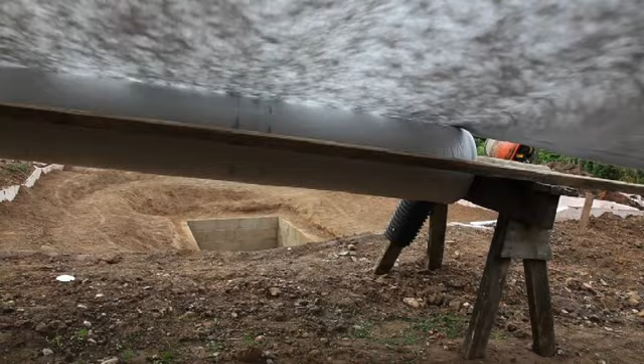I'll show you how I made this pool, and a new smaller plunge pool. The construction for both is the same. I'll show you my techniques for the installation, as well as the more novel ideas. How to make the swimming area with flat and smooth walls, without needing to cut the liner. Insulating the swimming zone, to help preserve the warmth gathered from the sun.

A pool filter built from scrap and domestic plumbing, running silently except for the sound of bubbles. And a solar-powered circulation system so animal-friendly an adult frog can pass through without so much as a bruise.

I like to think that many of us have come to the conclusion that what makes us happy in life is being connected to what's happening around us. Plunging into a natural swimming pool, you are totally immersed in nature and the environment. A truly exhilarating experience. And owning one of these is not an impossible dream. It's really quite achievable. After all, if I've done it, then many people can do it. So I hope by showing what I've done, that will inspire you to get out there and start digging for yourself.

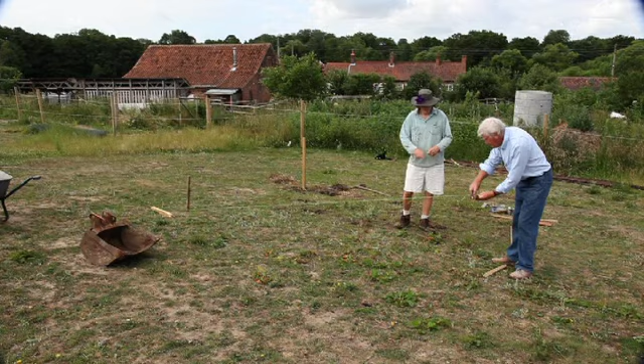To help us get right angles for the corners, I've prepared some string. A 5 metre length, a 3 metre and a 4 metre length, the same length as the plunge zone, because conveniently a 3-4-5 triangle is a right angled triangle. And with this triangle I can define the entire area.

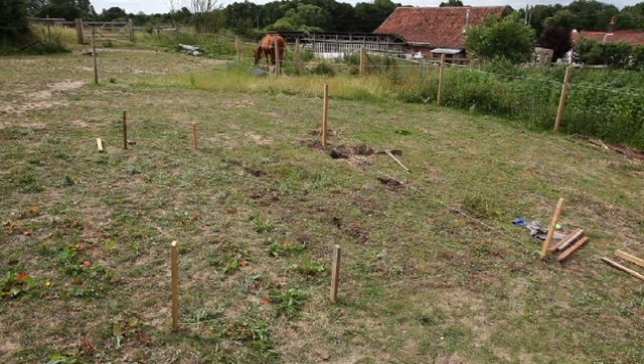Before you start, you should talk to your local planners to see if you need to apply for permission. You can dry hire diggers, but best of all, take your time and dig it by hand. There's no better fitness regime. Barry, can you do just a bit more digging as you were?

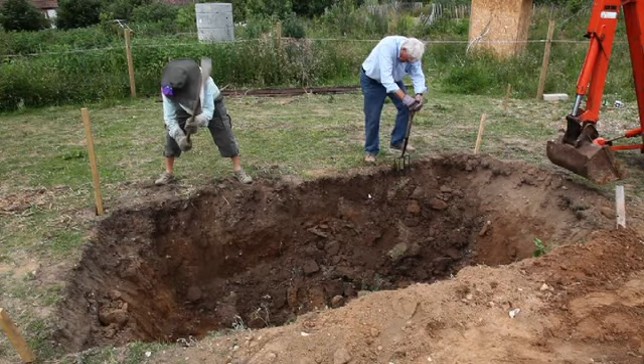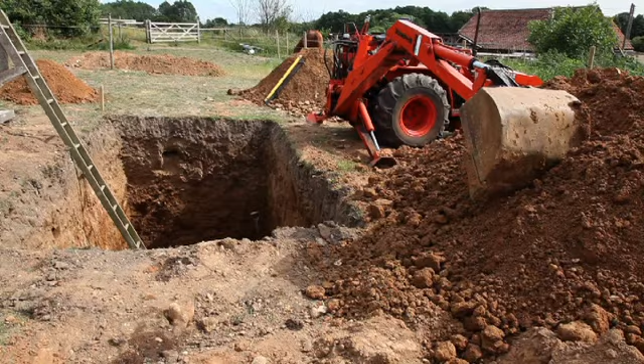The hole is now 2 meters deep. That's a lot more gravelly, isn't it? Yeah. We can dig a trench for a foundation that will carry a 1 meter high concrete block wall. We've been recovering some reasonable sand and gravel for us to use later, and making separate heaps of topsoil and subsoil.

The weather's been so kind to us. It's been nice and dry. It's allowed the integrity of the hole to stay in place. If it was wet, this clay would just turn to slush, and there's no way we could dig down like this. But as it's so dry, you could almost abandon the idea of building a concrete wall and just sculpt what we've got, the clay. But the situation could change very quickly if it rained, so I think it's best to pursue the idea of making a 1 meter high concrete wall.

I've made an important tool. I've drilled a hole through the cap of a plastic bottle and pushed in some 6mm diameter aquarium air pipe. I've also put a hole in the base to let air in. This is going to measure my levels.

Barry's not convinced though. Okay, now will it work? Barry the skeptic. Oh, yeah, is it going to be accurate? Well, we can just tell by looking at this, can't we? Okay, the length of that is about 5 meters. Millimeter accuracy. Yeah, it's not over 5 metres, it's only over the width of that. What do you mean? What, are you saying gravity is not going to work over this part of the pool, but it is over this part? It's going to be different. Gravity is different in different areas, isn't it?

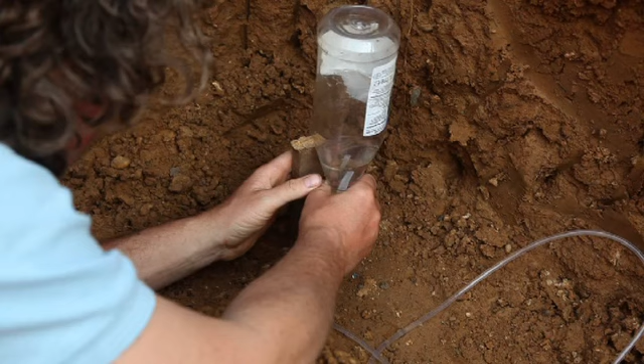Oh my goodness. Of course, I have to remember Barry's in his 70s and is far happier with a rotating prism laser level. Okay, that's level with the top of the peg. The top of the peg is 25 centimetres from the base and is the guide for the foundation thickness. Other pegs around the trench need to be level with this.

Yeah, right, no? I think it would have been better with the 2 bottles on. You see the level better. Oh yeah, now it's just a matter of seeing it better. Before it was a matter of it wouldn't work at all. I was only pulling your leg.

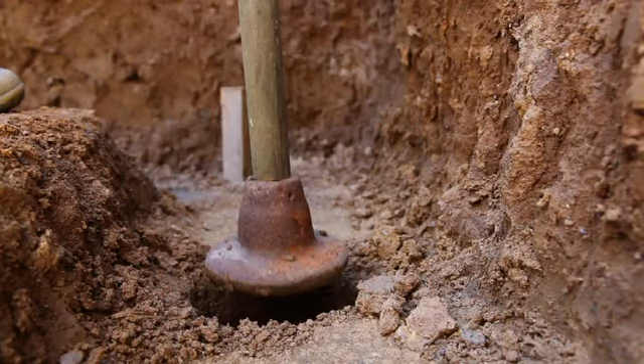Having been wound up, time to unwind with my auger. These holes will form piles in the foundation, just to help it grip the ground more. I've put them every metre or so.

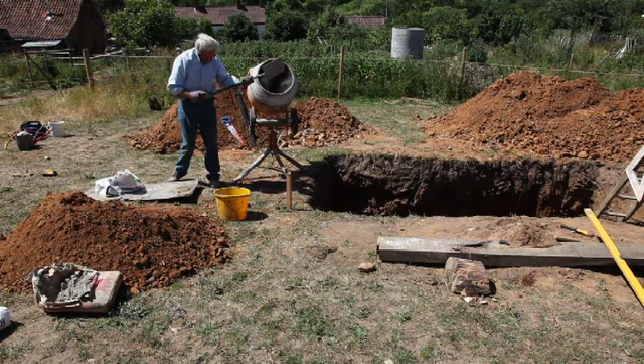Barry's mixing up. 6 parts sand and gravel to 1 part cement. Cement requires an awful lot of energy to make, so I don't want to use too much on this project. 8 bags in total will be needed for the foundation. Just a small amount of water to make a pretty dry mix. It should make less of a mess, and be easier to move around in the barrow.

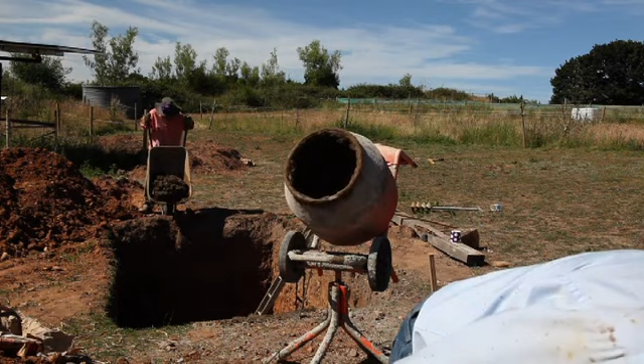Barry prefers the more direct approach. Our pegs show us the right level to smooth the concrete to. Top of the peg there. We finished the foundation, but as it happens, we don't know how lucky we've been.

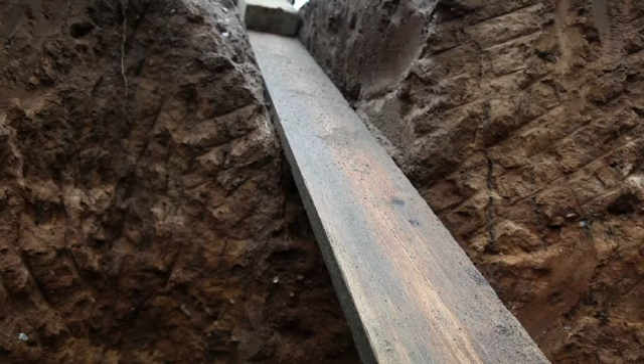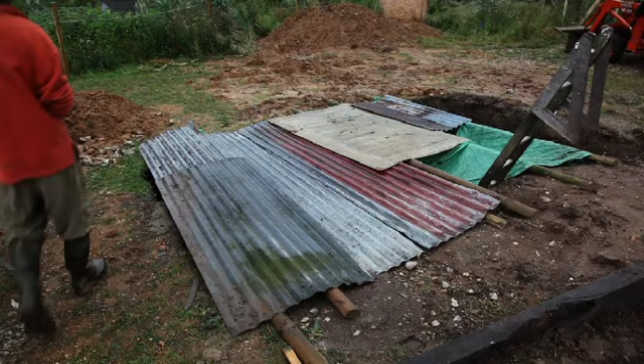The concrete blocks have to be stacked in the hole ready for building the wall. Barry has taken a look at the clouds and forecast rain, so he's cleared off home. Barry's weather eye was right. And in the hole there's more water than I imagined, producing a surprising water spout. The floor is covered in clay slurry, washed from the walls. They are badly damaged by the water. Yeah, the sides have collapsed. Well, one side, so I'm a bit fed up.

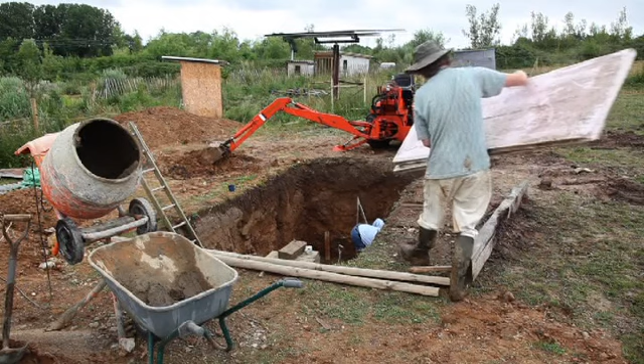The signs aren't good. Barry is pensive. There's only one option. Start building the wall. Yeah, pretty quick. On Wednesday, I think there's going to be some more rain, isn't there? Is there? No, I don't think so. But tomorrow? Well, yeah, there's tomorrow, isn't it? Yeah, it's a pretty unsettled week. So, with a sense of urgency, we put down the first row of blocks.

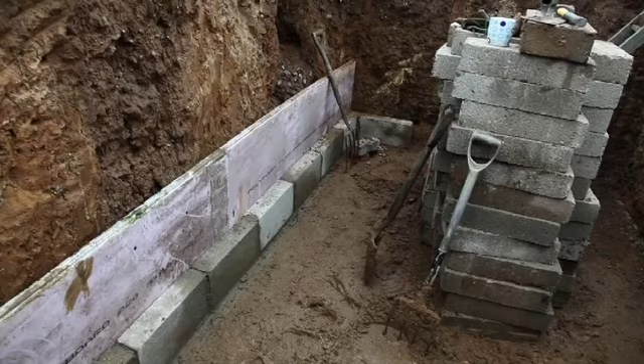I picked up some 50mm insulation from a reclamation yard. I've done some rough calculations, and insulating the wall of the swimming zone looks like a good idea, especially for a smaller pool. The ground temperature at this depth stays around 11 degrees centigrade throughout the year. In summer, the pool will be at least 10 degrees warmer. That temperature difference means that heat will be lost through the walls and floor. Insulation will reduce that loss, so the water should stay warmer.

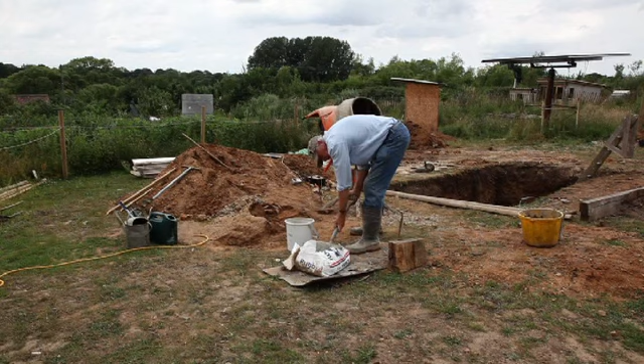The mortar for the blocks needs finer sand. Barry's doing the mixing, 4 parts sand to 1 part cement. A string tied to a couple of bricks in the corners is the guide for placing the blocks in a nice straight line. Although this wall will ultimately be hidden behind the liner, it's important to keep it all straight and level. If you start letting it drift, progressive rows will be even more deviant.

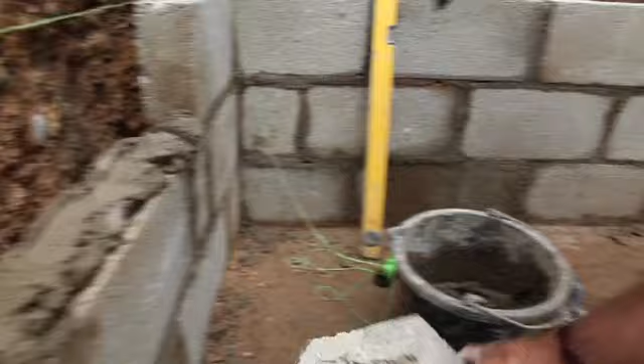The mortar ratio seems more variable. About 4 to 1. Mm-hmm. Well, that's about 5. Or sort of 5. Yeah. Barry's mortar proportions are difficult to pin down, just like our visitor. Come on back down again.

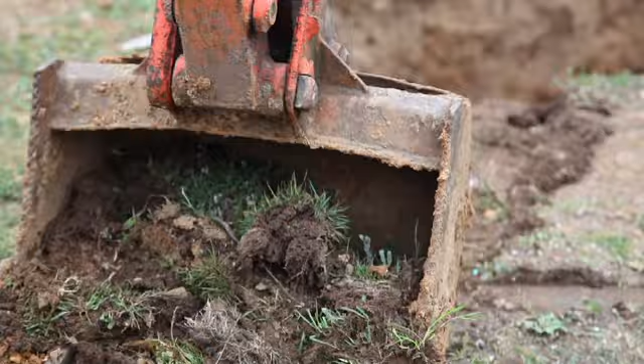Fortunately, the rain has stayed off, and the wall is high enough for me to start removing the rest of the topsoil. This is the profile I'm aiming for. The swimming depth is 2 meters. The block wall 1 meter, and then a sandbag wall on top, finishing 1/2 meter from the surface. Once backfilled with gravel and subsoil for the plants, the slope to the edge of the pond will be around 1 meter in 4.

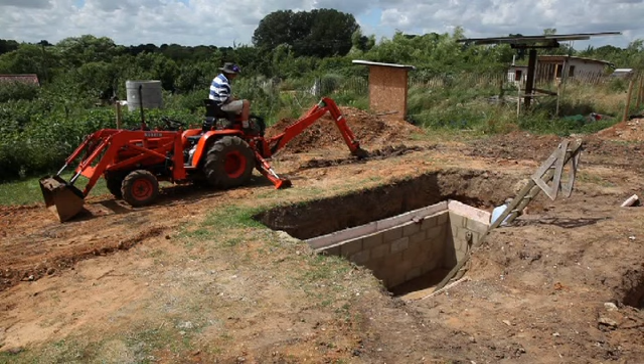I've made a trench 2 meters from the edge of the plunge pool to define the area of topsoil to be removed. Barry's finishing the wall. We built it up to 5 courses of blocks, just over 1 meter high, and all insulated. Although this topsoil is pretty poor, it needs taking off and heaping up out of the way. It will be needed at a later point for the landscaping.

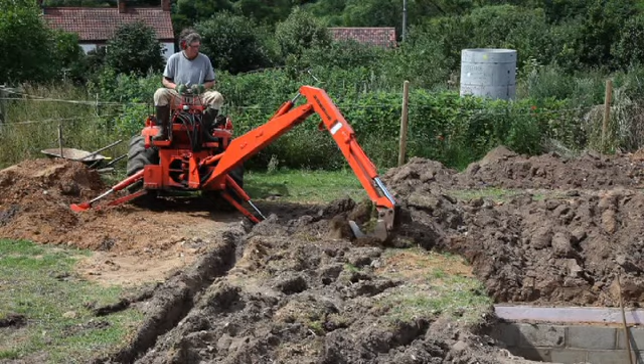Judging by this performance, you're probably thinking getting professional help for the digging may be well worth the money. For a pond this size, with a proper digger and driver, I reckon it should come to a total around £300. After the mauling by the machine, it looks a bit of a mess, but at least we are beginning to see the shape. All that's needed now is some hand crafting.

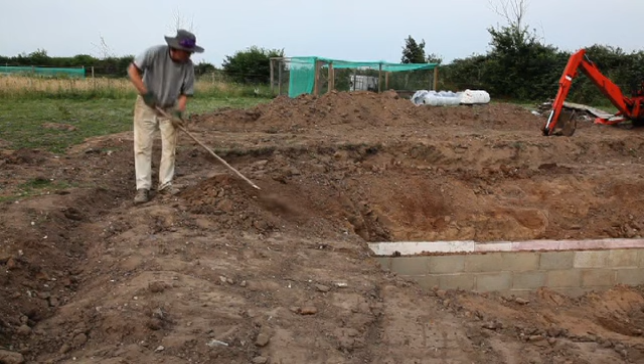Barry has gone off to work on a proper job, and I am left alone with a couple of chickens and my bottle. Actually, I've since found out it's called a bunyip. I've mounted the bunyip on a post corresponding to 2 meters depth. The pegs are showing me what will be the finished water level.

As this site is on a slope, I need to build up this side of the pond to this level, because that corresponds with 2 meters depth of water, so it needs to be that level or above. So I've got to build the earth up here. I thought what would help me are these insulation panels. I got them from the reclamation yard really cheap because they came from an old turkey shed. I thought I could just put these here and build up the earth either side, and that would form a retaining wall for me.

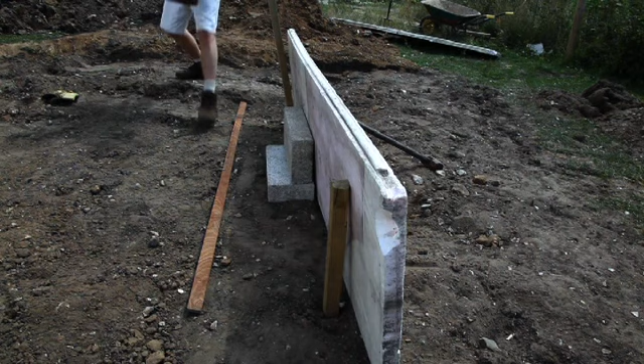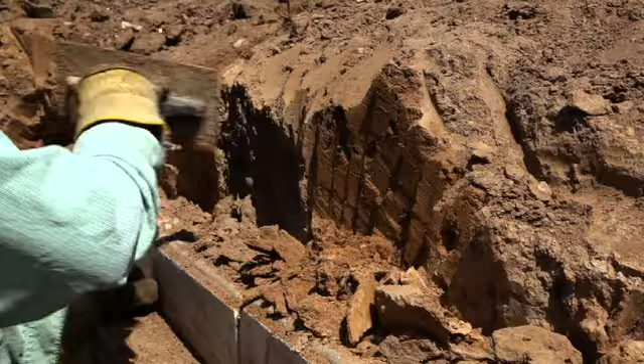These sheets are just what I had to hand, but you could use a variety of materials. Of course, if your site is level, you don't need them, and you've got a bit less work to do. I'm piling up subsoil either side and starting to make a smooth bowl shape. If the subsoil was less stable, I could have made the wall stronger. By stacking the blocks face down, this would make the wall around twice as thick. Of course, it would need twice the number of blocks and a wider foundation.

The good thing about having an edge is now I've got something to discriminate between my rubbish stuff and the good sand. The section that was washed away in the rain has been filled and needs tamping to help it settle. To trim off this insulation, I'm using a kitchen knife. It's not a very good one. Certainly won't be much good after this, but it does the job. When the liner goes on, we need the ground underneath to be firm, otherwise the weight of water will put it under stress.

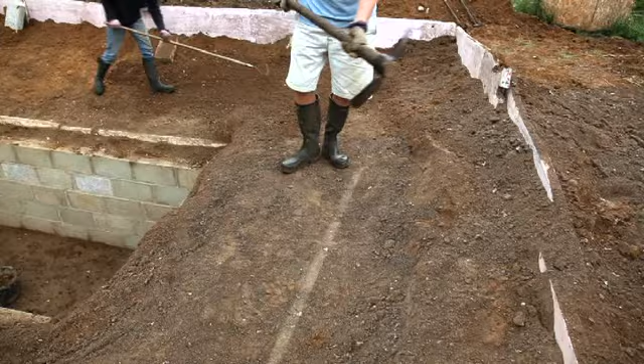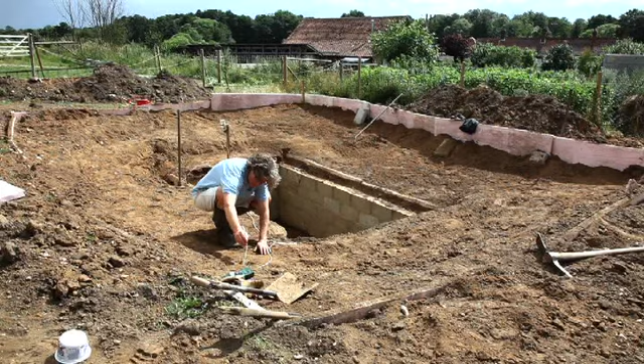The pond's bowl shape is getting smoother by the hour, and it's a very satisfying sight for a pond maker to see a pile of sharp flints safely outside the perimeter. I'm having bunyip withdrawal symptoms, so it's back out again. I'm checking levels just to make sure this bowl shape is going to hold water.

It's very important to fill behind the wall with sand or subsoil. When the pond holds water, if there's a void, the wall won't be able to transfer the pressure from the water to the ground behind it. Potentially, the wall could crack. Probing with the handle of my tamper, I can feel a large hole here. I'm trying a trickle-down approach with a clay slurry chaser.

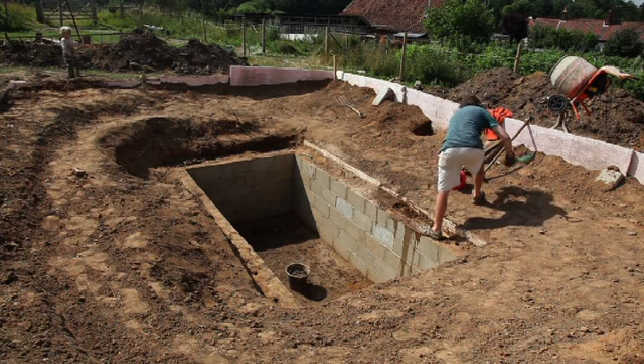Felix thinks the important bit is to do the outside of the pond. A big void. Ooh. Bit of a sloppy cob mix, isn't it? This is how not to build a cob wall. I tell you what. Oh.

So Alison's very kindly cleaned the bottom so it looks a lot better down there now. We're just going to go around the outside smoothing as much as possible, and hopefully the rain will keep off, and that will allow us to get the underliner there, and then the liner. Once we get the liner in, we can sort of relax, but we can't at the moment.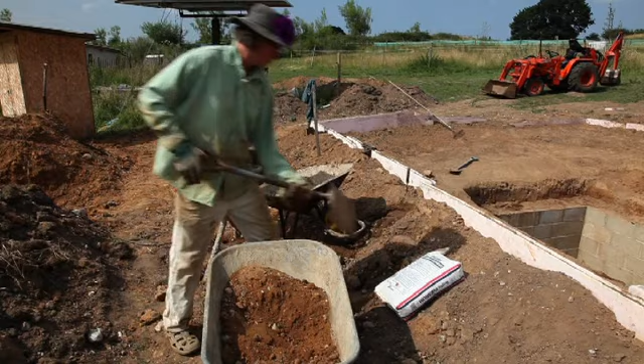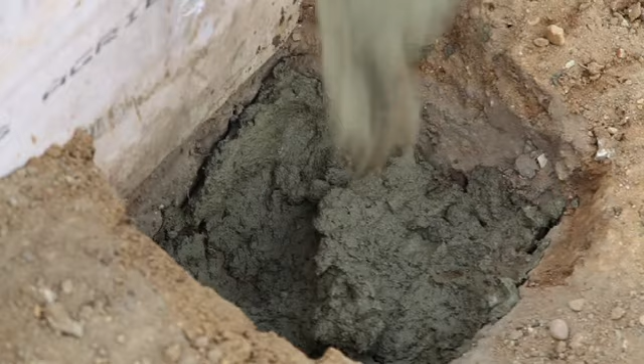I'm mixing up again to make a foundation for the overflow drain. I've dug down to firm subsoil. And I'm adding another piece of insulation board just to make the wall a bit stiffer. The foundation for the drain has hardened. I'm taking off the rough edges to be as kind as possible to the pond liner. Not content with that, I'm also giving it a comfortable bed of freshly sieved sand.

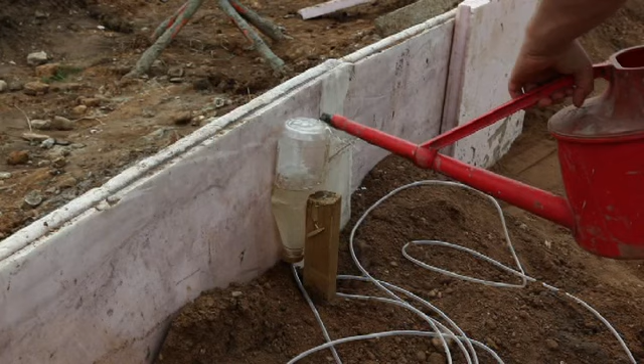I'm going to share the delights of the bunyip with Jasper, my eldest son. Yeah, it's come down. Okay then, can you mark the water level on the insulation? We're marking the maximum water level on the insulation boards. Very good. It also serves as a simple physics lesson. I'm learning quite a lot. Sorry about that. Now I know what level to trim the boards.

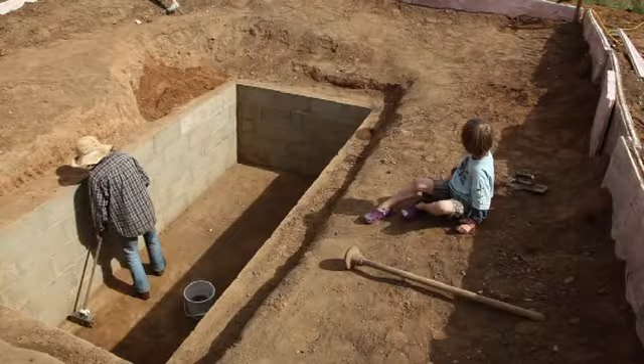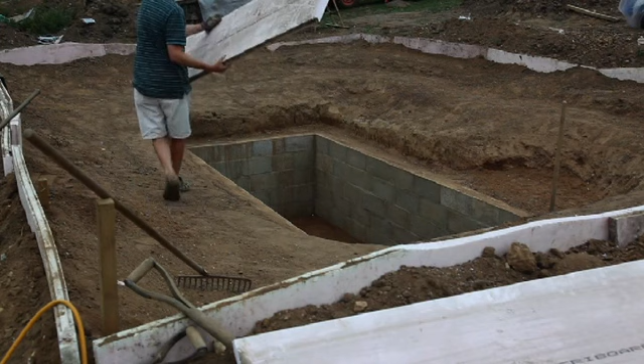Smooth sand makes for a nice smooth bottom. Yes, it's more of this stuff, reclaimed from the turkey sheds of East Anglia. Just a topping of hand-sieved sand brushed into the cracks and corners, and it's all prepared for the brooding presence, the underliner.

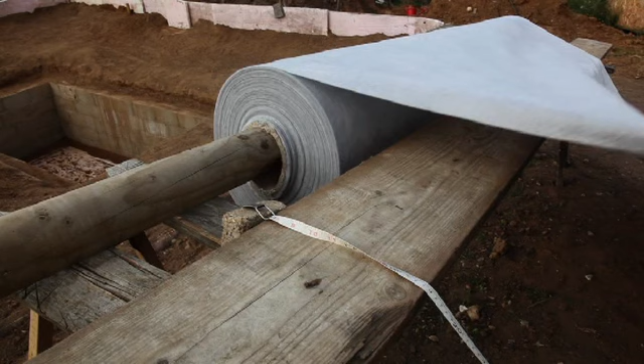The pond is 6 meters wide, but goes down 2 meters and then another 2 meters back up, so I need 10 meters width of underliner. The fabric is called Polyfelt TS60, 260 grams per square meter. It's a non-woven synthetic material. I'm cutting enough lengths to cover the whole surface and go up and over the outer edge.

To fully protect the liner, the sheets need to be stuck together to form one continuous protective layer. It will also help stop them blowing away. But glue is not the answer. All you need is one of these. There we go. Look at that. Make it a bit better. Stuck.

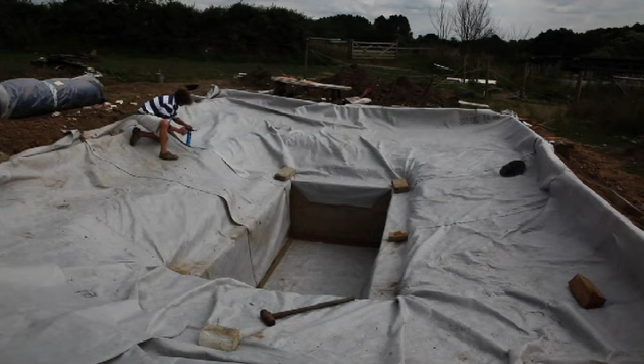Another length of underliner lengthways, and the bottom will have 2 layers. I've also put another layer on the top edge of the wall and in the corners. Now we're more than fully covered. A large, expensive piece of plastic is arriving.

Okay, lovely, that's fine, thanks. It's the liner. Thank you very much. Lovely, great. Thank you. Thank you very much.

It's early morning. Cue the cockerel. I've not used this product before. It's a synthetic EPDM rubber called PondGard, manufactured by Firestone. It's sold as seamless, but I think these are seams.

Now, I've got no problem with the seams actually leaking. I don't think they'll do that because they've been done in a factory. But it's when I come to fold it, if I'm trying to make a nice, neat fold and I hit a seam, that might just make it a bit awkward. So I'm going to give them a ring and see why I've got seams in my roll.

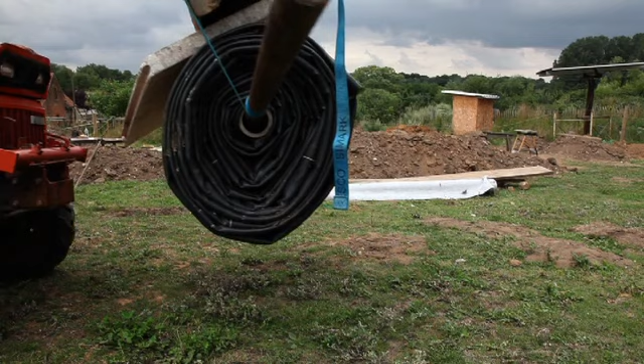It seems they're not seams. They're called joins. They've been fused as part of the manufacturing process, so can't fail. I figure they should also fold reasonably well, so it's full steam ahead. The liner is just over 15 metres long and 12 metres wide. There we go. Whoa, she's away. It's 1 millimetre thick and weighs 232 kilograms.

A team of 10 men is recommended to move this around. Otherwise, find a friend and a stick. The liner is rolled by the suppliers in such a way that it needs to be positioned lengthways in the centre of the pond. Then it can be unfurled to one side and then the other. You'll have a huge job if you roll it out the wrong way and have to rotate it afterwards. It's hard enough doing it the right way.

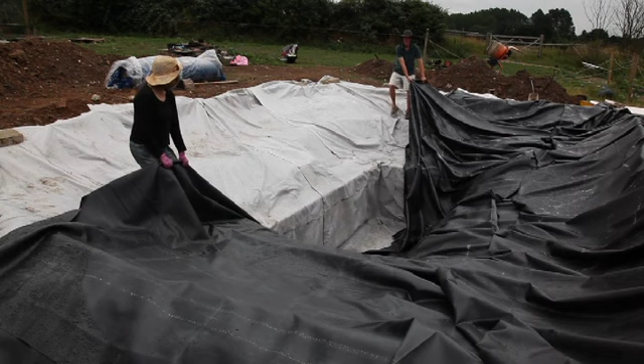Got one end. Oh, one side. Well, we've got half done. Right, here we go. Well, we've got water in it. This heaving and pulling is self-explanatory, but I think it's useful to watch the struggle. You all right? No, it's fine. Well, I think that's it. Well, not quite yet. Right, where do you begin?

Yeah, do you? If you're directly in line with this wall, just the edge there, what we're going to need is a fold which is actually half that height. So that's about 1 meter 10, so it's going to be about 55 centimeters. So we can just do it roughly. That's it. Yeah. And this will roughly sort of work out, and then we can fine tune it later. That'll do for now, yeah.

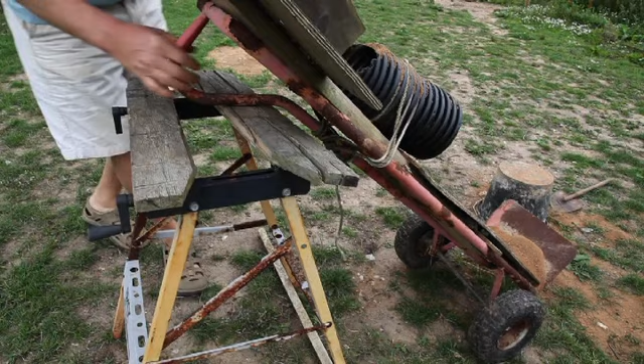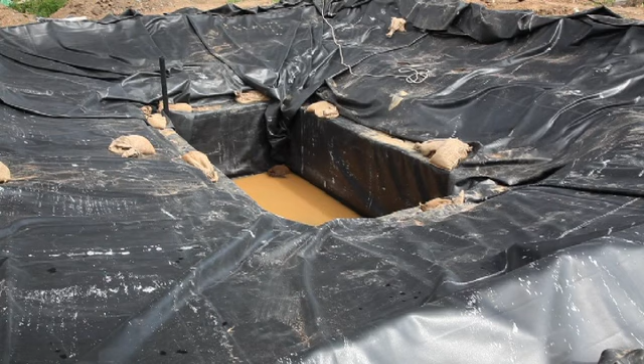I've made a portable and quite stylish tool. I call it my sandbag machine. It helps me fill sandbags, and in return I don't strip it back down to be a sack trolley. The sandbags are holding the liner roughly in place, but I'm aiming for smooth walls and floor, so this involves some mega origami.

To help me form folds in the corners, I've got a length of rainwater pipe resting on a sandbag in the corner. The other end of the rope is held by today's glamorous assistant, this bucket. First of all, the width of the overlap, which is half the height of the wall, needs the creases taken out. It takes massaging and poking to get it flat, and of course, my sandbags.

I'm just pushing, just taking out as many creases as I can. Stand at the bottom of the liner, just roll it up, a bit like you're smoothing out wallpaper. A bit heavier. Okay, push it over into the corner. That's the stuff underneath. Keep your finger there, and then it's a matter of just pulling this back until you get a nice overlap. There we go, nice and flat.

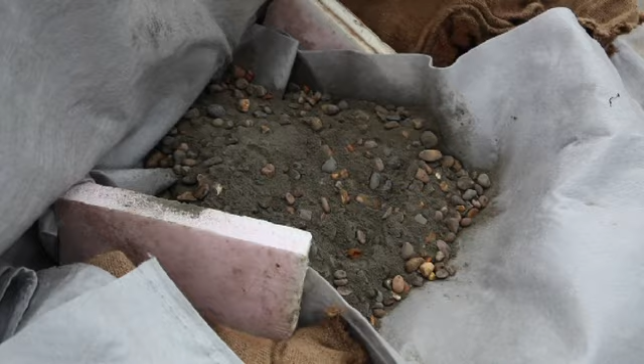This is where the pad is for the exit drain. The concrete pad is down there. It's under the liner and the underliner. I've just put a ring of sandbags there and another couple of layers of overliner there, just so I can put this concrete in. And at this stage, I also need to incorporate a splendid device.

Right, over here we have my pond circulation system, which consists of nothing more than a 110mm drainage pipe and a 90-degree bend. This is going to fit around here in the sandbag wall when I've finished it, and it's going to be powered by nothing more than air.

The drainage pipe bend goes through the sandbag wall into the bed of gravel under the planted zone. It's the plant root systems that condition the water. To move this biologically cleaned water into the swimming zone, we're not going to use a conventional pump. We're going to use bubbles.

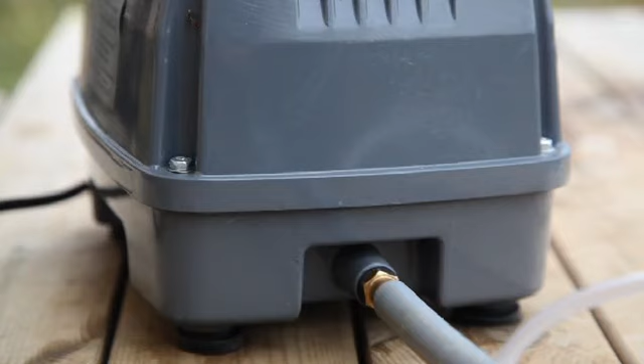This is an air stone used to aerate aquariums, and this is a diaphragm air compressor, also for aquariums. If I drop in a piece of rainwater guttering pipe, the rising column of bubbles accelerates the water inside the pipe. The water is forced over the top and consequently drawn in at the bottom. The pump uses only 60 watts of power, and it's enough to provide circulation to a fairly large pond.

If we place the air stone inside the bend, the column of bubbles rises up, taking the water with it. The water is gently drawn from the gravel bed under the plants. The flow of water enhances the plants' ability to absorb the nutrients, making life hard for algae, as well as filtering the water. The sandbag wall is to retain the banks of gravel, and the overliner protects the liner below.

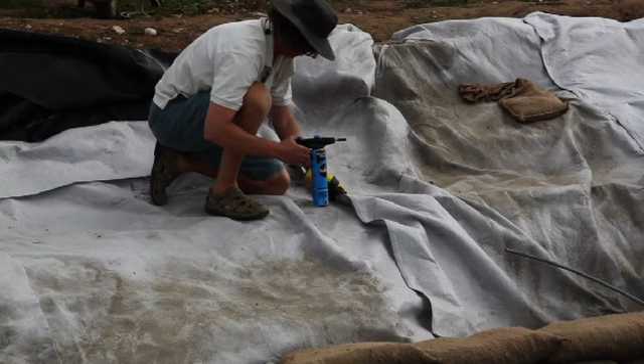As well as the drainage pipe fitting, I've also put in strings and 15mm plastic plumbing pipes in various places, just in case I need them later. I've pulled back the liner behind the exit drain to make a 110mm hole. I'm just using a hole saw.

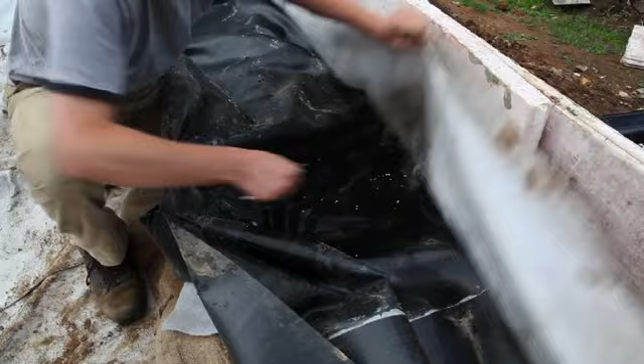Just hold this up to measure. We've got plenty of slack there, and I'll give it some slack, plenty of slack here. So I think if I aim for the hole to be about there, then that should work out about right. That's the centre. Okay, so I've got it marked there.

I've got a bit of pipe here, a smaller bit of pipe, just so I can see what I'm doing. Now I'm going to cut a hole, but it's going to be smaller than that. So I'm going to radiate inwards. I've got a nice sharp knife now, thank goodness. Okay, that should do us.

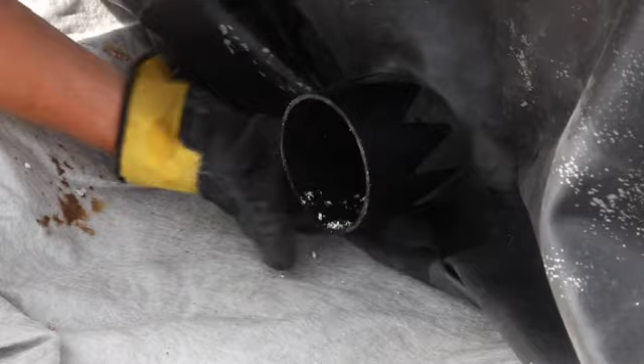To seal it to the pipe, I'm just going to use waterproof duct tape. That's very sticky. Well, it's sticky. Right. Okay, that feels nice and snug. Couple of slack there. The fabric overliner will be protecting the liner, but I need to cut a slot to let the pipe through. Okay. And just for good measure, another piece of geotextile to cover that slot.

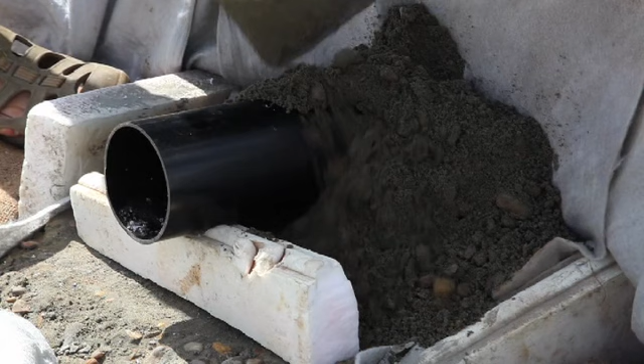I've got some more dry mixed cement to heap on top. Some gentle patting, and the exit drain has made an exit.

There's 3 different sorts of shingle from different quarries. Which is the smoothest to stand on? So what do you think, Theo? This one. Yeah? Okay. Proper scientific experiment, so don't let Theo influence you. Probably the last one. The last but one? I think the last two are very similar. Okay, decision made.

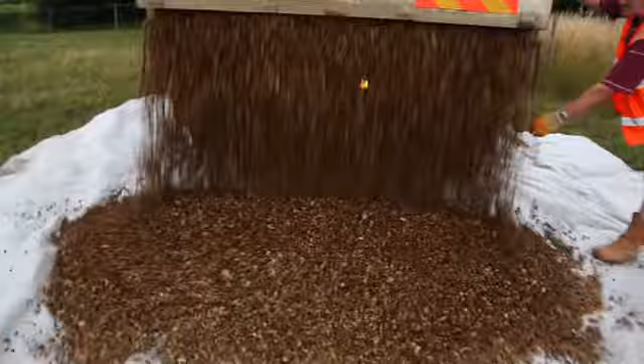This is the smoothest shingle I could find locally. It's mainly nice rounded stones that are easy to walk on and won't puncture the liner. Marine shingle would be smoother, but I'm wary of the environmental impact dredging for shingle is having on our seas. I've bought 20 tons, but only half is needed for the pond. The kids are hoping to find dinosaur fossils in there.

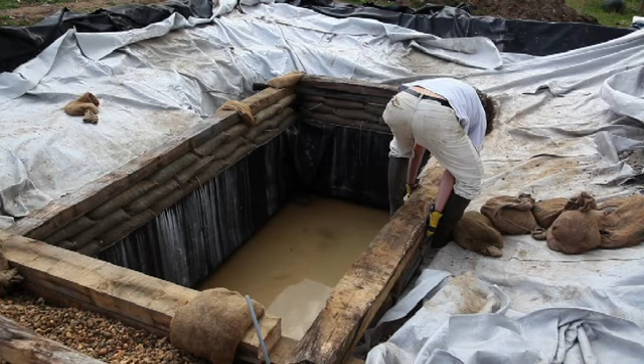I picked up these oak sleepers from the reclamation yard. They're rejects, but I love them. They will make a fine finish to the top of the wall. They need a few joints, so any carpenters watching, look away now.

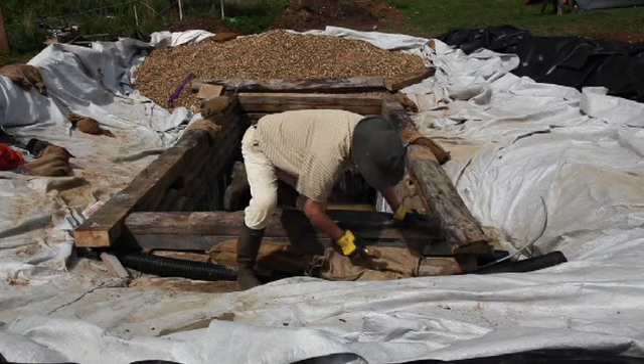10mm stainless steel rod is driven in to pin them together, and wedges are placed here and there to keep the frame level. I'm tidying up a gap under the oak, pushing in a sandbag loosely filled with sand and cement. I've left haunches on the oak frame. Sandbags will secure it and stop the frame from floating when it's submerged in water.

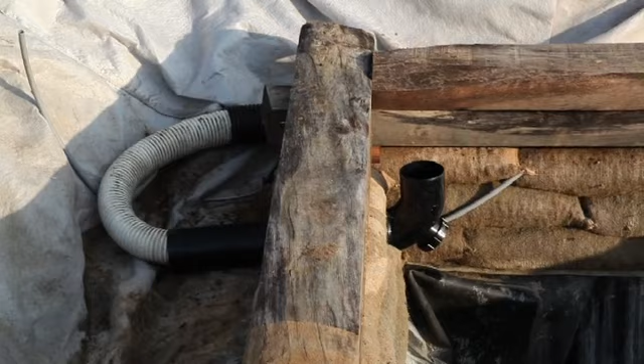A few oxygenating plants just to get the biology going in the rainwater collected at the bottom. These are my flexible drainage pipes. I pulled them out of a skip. One end is shoved into the fitting that goes through the wall. The flexible pipe is laid around the planted zone of the pond, and the pipe will be buried in a layer of gravel, allowing access to the conditioned water under the plant roots.

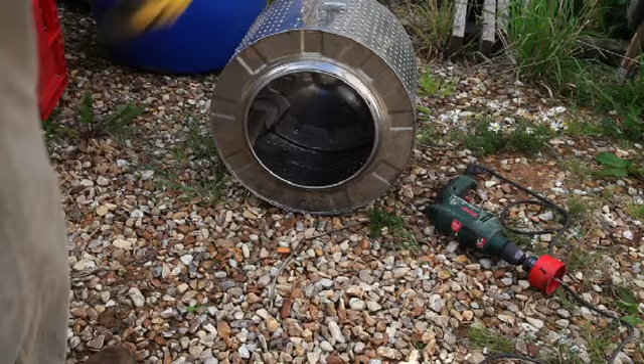The pipes are taped together, and I've bunged in fabric to block up the end. The pipe needs to be perforated flexible drainage pipe, but that wasn't in the skip, so I'm perforating. This is a stainless steel drum taken from a washing machine. It will soon be part of my pool filter. It needs a hole in the bottom. I'm using a 70mm diameter core drill.

And here a former fruit juice barrel. I found it in some rubbish on an industrial estate. It also needs some 70mm holes. The plastic is really quite thick, and the whole barrel very strong.

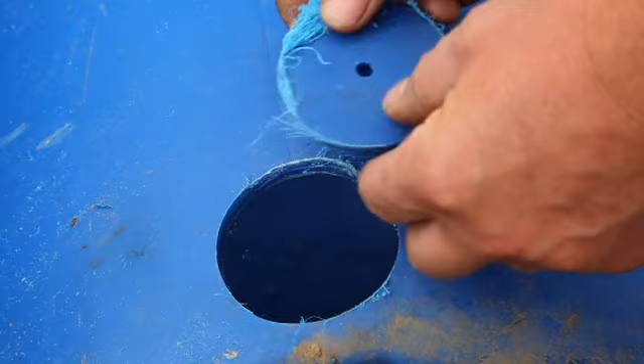Okay, here we've got the fruit juice container that I got out of a skip. Drill the 2 holes in it. Piece of 70mm drain pipe. So shove in there. Another piece with a right angle bend that goes in there. Then we've got the washing machine drum. Drill the 70mm hole in so it should all fit. And now we've made a filter.

What do you think? Bit ordinary. Bit ordinary?

Rainwater is collecting in the pond. Once the liner is in, if you take your time finishing the pond, the rainfall might have filled it by then. The filter needs some ballast in the bottom to keep it in position. And another pipe.

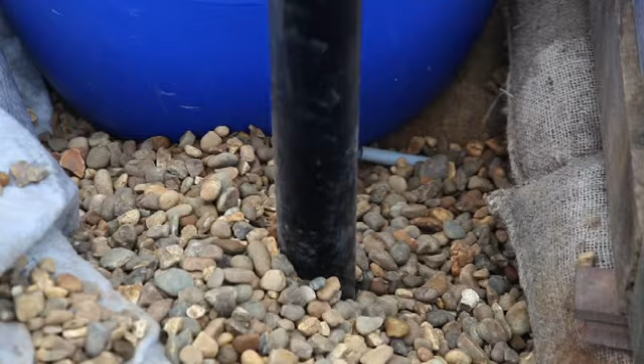A bed of gravel also needs spreading over the flexible drainage pipes, and another layer of geotextile. I'm just holding it down with some gravel, but subsoil will go on top of this for the plants to grow in. However, my heap of subsoil seems to have some creatures in it, so I'll get on and trim the liner. I ordered a liner that was slightly bigger than I need, but I figured it was best to err on the side of caution.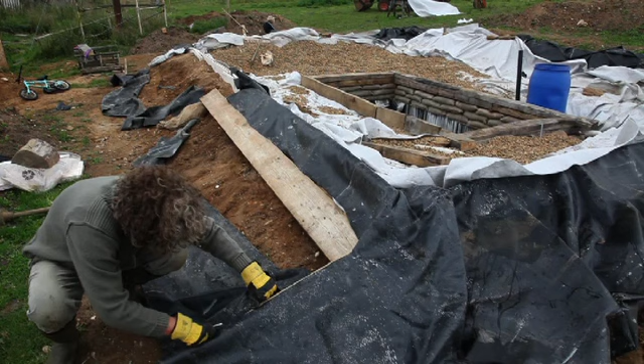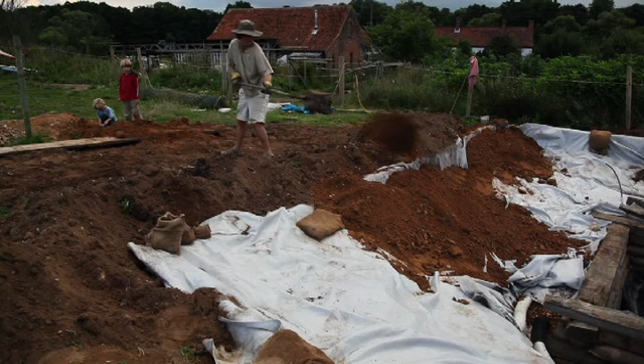The trinity of the underliner, the liner and the overliner can now be neatly tucked along the edge. The creatures have left my heap of subsoil. I'm putting a bend on the exit drain. That will just help keep out the soil. Time to bring in some specialised gravel moving equipment.

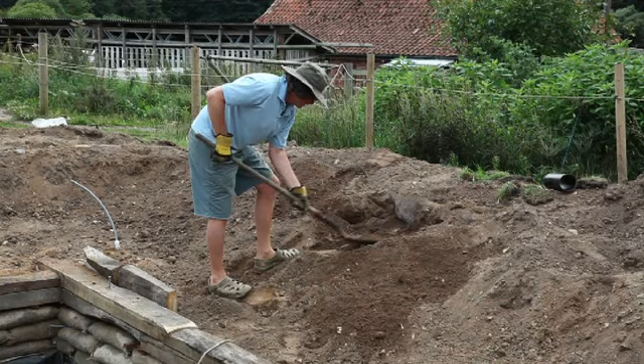The exit drain needs a small extension. I just got a little bit of oil and I just rubbed it around the lip there. I think there's some specialist stuff you can use, but this is just to hand. And then that goes in easily. But with a bit of oil, I suppose it'd help if I had the pipe straight to begin with.

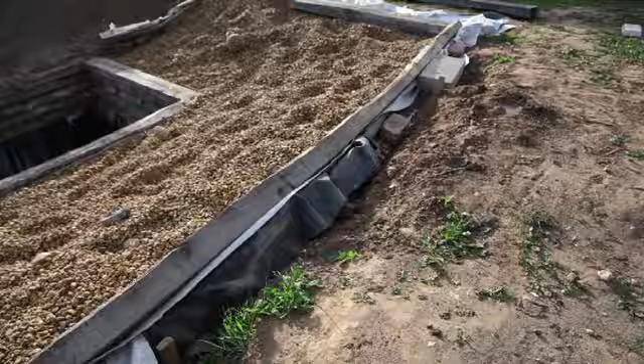The ground level is higher on this side of the pond, so I'm using some of my oak sleepers to form a step up. Having jammed the liner down with blocks and bricks, I'll just backfill with gravel.

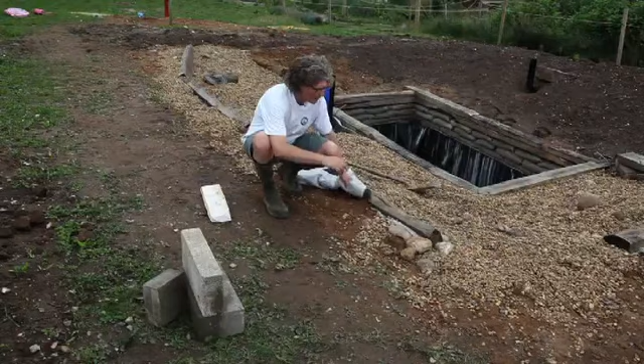The important thing about the edge is that the liner must end up in a vertical position. You don't want water seeping from the outside into the pond. It'll have nutrients in it from the topsoil, and it's no good for wildlife ponds, and it's no good for natural swimming pools. Fortunately, there are many ways to achieve that. I just used a piece of insulation, and so the sandwich of underliner, liner and overliner went up and over,

and I backfilled there. Alternatively, if you weren't concerned about using too much concrete, which I am, you could make a concrete bed, or mortar bed. I've just represented it by a block there. On top of it, put a block, and then have your liner come up like that. The best thing for wildlife would be to then backfill that with shingle or some other substrate, or you could face it with timber. You'd have to fix it through there, of course.

Another method to achieve it is to use a roll of this. It's damp-proof course, used in building walls. Hammer in stakes along the perimeter of the pond and nail this to the face of it. Then your liner just comes up like that. Fill there with your pond shingle or substrate, backfill with topsoil. And there's a really low energy, quite simple way of doing it.

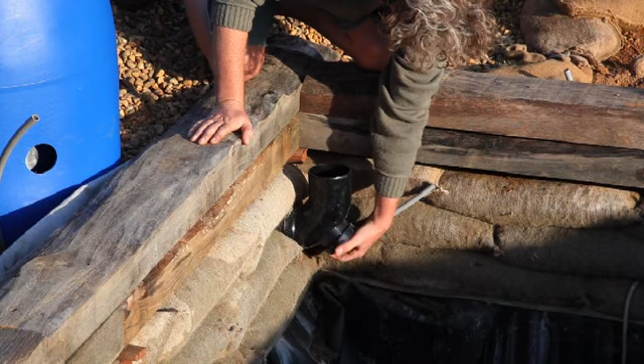6.5mm through there. Okay, and then just come to our pipe. Now I need a 5.5mm drill. This just needs to be a small piece. That will just fit. There we go. Very nice snug fit there. Some inserts in there. That just fits on. There we go, ready to go.

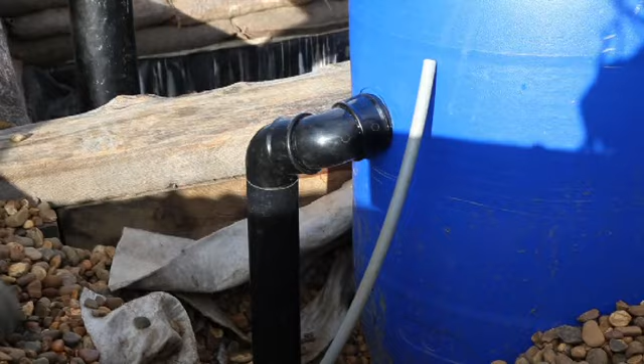More guttering fittings. Got a couple of 90-degree bends, length of pipe, some offset bends, slightly more than 90 degrees, 2 of them. Good thing about putting 2 offset bends together is that you can then get almost any angle. Another short length of rainwater pipe, and the structure of the filter is complete. Just a couple more holes for the air supply.

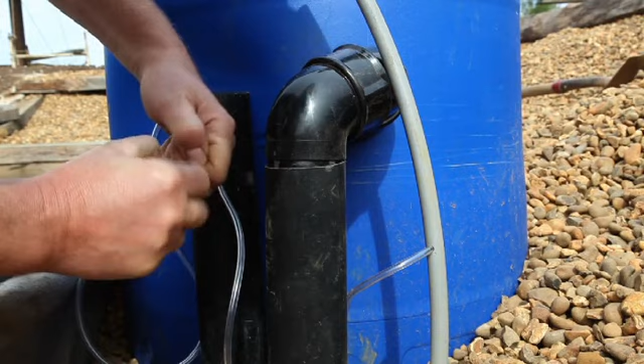More 6mm aquarium airline pipe is fitted and threaded through, ready for the air stone. This time I've got a round one, just for the sake of variety. There's no need to fix this air stone, so I'm just going to rest it at the bottom of the pipe. This is how it should work. The air bubbles form a rising column of water, creating a flow through the barrel. Water from the pond passes into the washing machine drum, where it can be filtered.

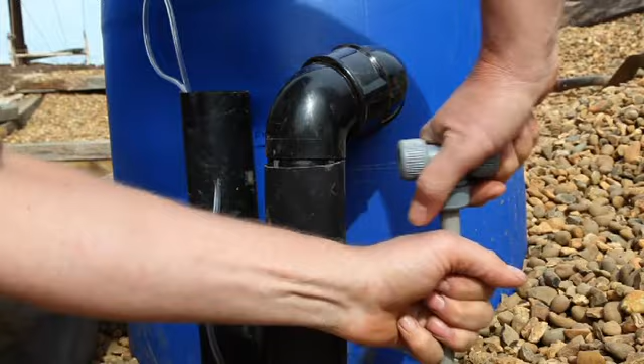I'm trimming the 15mm domestic plumbing pipe, which is serving as my air supply, and connecting it up to all the other potential outlets. The pipe runs around what will be the planted zone and leads to an air pump some distance away from the pond.

The filter's washing machine drum needs some filtering fabric. I've just got a piece of scrap underliner, geotextile, put a hole in it. Push it inside the washing machine drum, push that inside the filter, spread out the fabric. That'll be a nice filter, and for what it's worth I just put that on there. The filter is ready for its air supply and ready for water, although I'm not entirely sure this thing is gonna work.

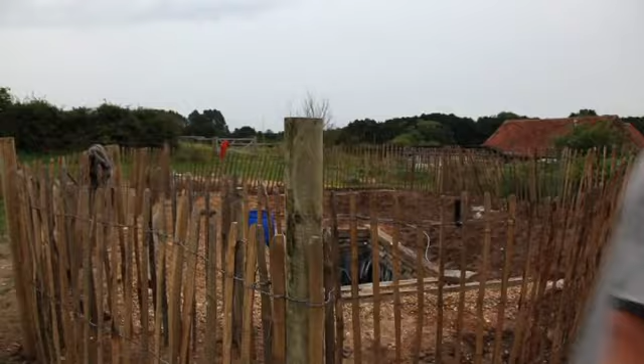Safety is always the most important consideration, and it's vital to have a fence around the pond. I'm using chestnut paling. In total, I have around 30 metres. That will only just about go round. There we go. The pond is in danger of looking a bit twee, so I've added some architectural brutalism. On the other hand, the water collected in the pond already has a less than glamorous white powdery film. This is quite normal for a very new pond.

Rainwater is the best water for a pond. All the water I've collected from the roof I am pumping in. Rainwater is soft water and contains very few nutrients. The spare outlets for the air feed are capped up with plastic stop ends, and the folds in the corners will soon be squashed flat with the increasing water pressure. I've exhausted my supply of roof water, and I would normally wait for rainfall to fill the pond, but because of the pressure of filming, I'm having to raid my existing pool.

I've also raided it for some plants. This lily is Nymphaea alba. And most importantly, some oxygenating plants. Elodea crispa is not native to Britain, but grows quickly, removing nutrients from the water. It can then be easily harvested for composting.